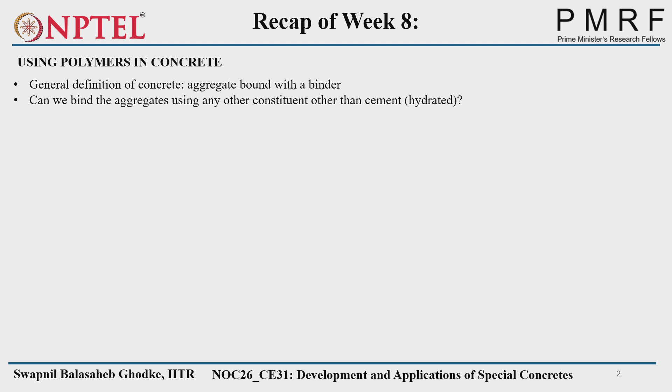So what is polymer or polymer concrete? We know concrete is mainly about inert materials and some binding materials. In the case of aggregate bound with binders, the binder is cement. But is there any other material available which can bind these inert materials? So we have polymers and asphalt. Today we will discuss polymers. Asphalt is mainly about pavement materials.

So three types of polymer concretes are available. First, polymer is used directly as the binder to replace Portland cement in gluing aggregate together. There may be presence of cement or may not be, but the binding properties will be given basically only by polymer, not by cement. We will see this in detail.

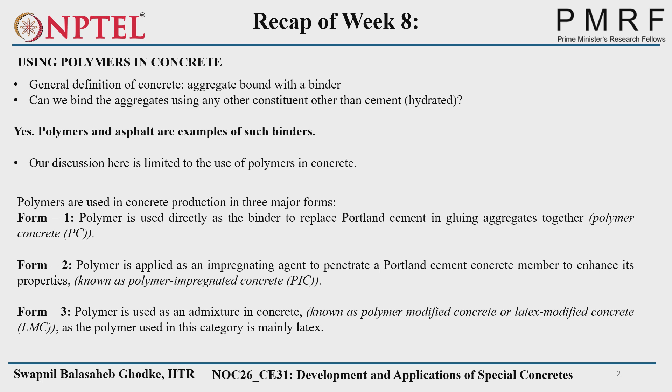Second, polymer is applied as an impregnating agent to penetrate a Portland cement concrete member to enhance its properties. We already have some concrete specimen, and then we impregnate that polymer into the pores. That is the second form of polymer concrete. Third, polymers are used as an admixture or as a replacement of water.

In polymer impregnated concrete and latex modified concrete, the polymer works together with the cement binder. But in the case of polymer concrete, the polymer acts as the sole binder because there is no water available. Although cement may or may not be available, water is not available, so cement will not hydrate if it is present, and that cement acts as a filler, only filling the pores between the concrete matrix.

So the basic concept of polymer concrete is to replace the cement hydration reaction with polymerization to produce a strong and compact material. We know cement hydration is the process to get the CSH gel and the hardened properties of concrete. Similarly, to get the hardened properties of polymer concrete, we have to go through the process of polymerization. So what is polymerization? We'll see in a couple of minutes.

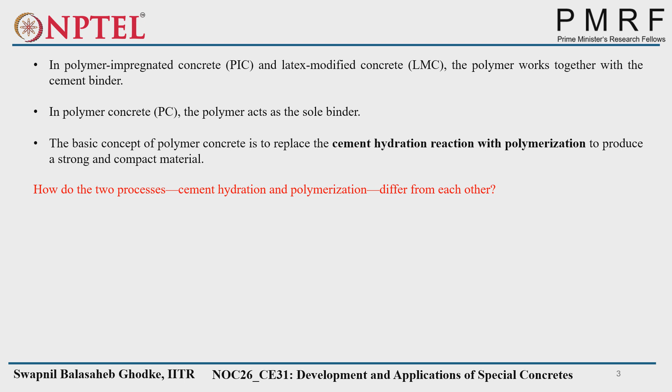So how do the processes of cement hydration and polymerization differ? Basically, Portland cement concrete's binder is cement. It involves a hydration reaction and requires water for that purpose. It is a slow process; we have initial setting time and final setting time. No external heat is required in this case because the reaction itself emits heat - that is an exothermic reaction. Products change with time.

In the initial period we'll have a different value of stiffness or modulus of elasticity. After some time we'll have a different modulus of elasticity. So stiffness changes with respect to time, and the hydration products also change with respect to time. Hydrated products contain voids or cracks too.

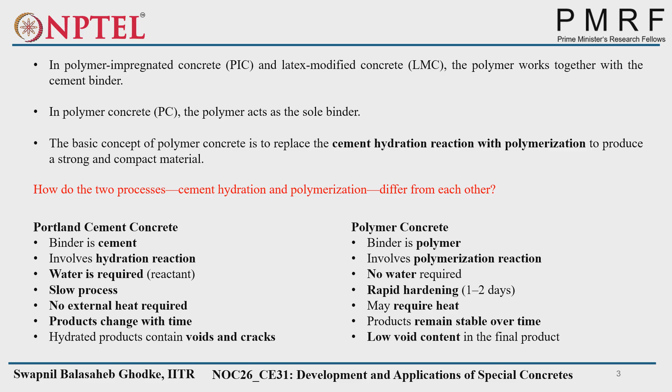But in the case of polymer concrete, the binder is a polymer and it involves a polymerization reaction. Here, no water is required, and hardening is rapid - only 1 to 2 days. In Portland cement concrete, the days required for hydration are more than for polymer concrete; full hydration we consider up to 28 days. In polymer concrete, due to absence of water, we require external heat. Products remain stable over time, with low void content in the final product. So these are the differences between Portland cement concrete and polymer concrete.

So what is polymerization? Basically, polymer is defined as an organic material composed of a series of repeating chemical units, and the single chemical unit is called a monomer. If you see this image, this is the monomer - this is an example.

This is the monomer which has the bond CH equal to CH2. When the polymerization process takes place, this single monomer connects to another monomer, and this CH2 bond is connected together. So a number of monomers connected to each other, that is called the polymer.

This N is indicating the number - how many monomers are connected to each other. It is called a polymer. This process is called polymerization, from monomer to polymer connectivity.

So a monomer is an organic molecular species that is capable of combining chemically with molecules of the same species or with other species to form a polymeric material of higher molecular weight.

You can see this monomer is connected with the same chemical unit. But sometimes in the polymerization process, one monomer connects with another type of monomer. That is also a formation process, and it's called polymerization.

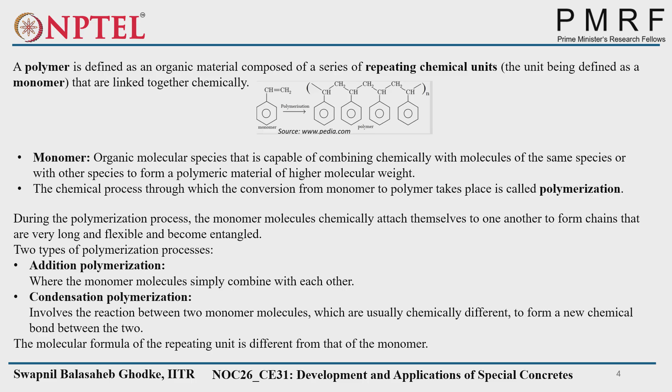So two different types of polymerization processes are there. One is addition polymerization, where we get simple addition; condensation polymerization, where we get chemically different polymers connecting with each other by chemical reactions. And the molecular formula of the repeating unit is different from that of the monomer.

So basically, when it is connected to each other, it creates a chain, and that's why it is also called a chain reaction. Polymerization does not start automatically - it requires initiation by the action of a free radical on a monomer molecule, that is CH equal to CH2. We saw that the free radical will react with the other type of bond and create the polymerization reaction.

Then we have to provide heat also, or in the presence of a promoter. Free radicals are formed by decomposition of relatively unstable material called an initiator or catalyst.

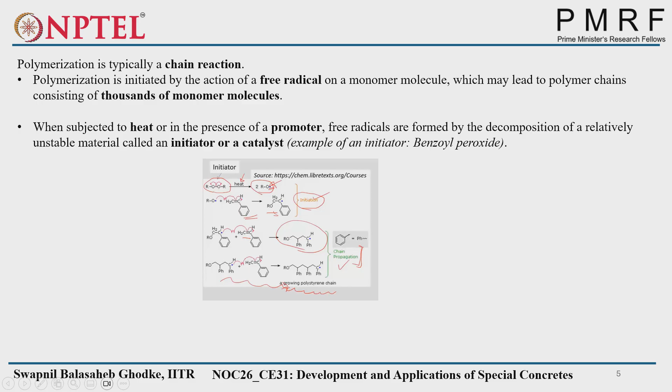In this image, oxygen is bonded here, and if you provide heat, the chemical composition changes, and that acts as an initiator. It connects with some monomer, and that monomer initiates the reaction and connects with another monomer. Then the chain reaction starts, and chain propagation gives a polymerization reaction or polymer, and that polymer we can use in the concrete.

This rate of polymerization, from forming the monomer to the polymer, depends on the concentration of initiator and temperature - meaning the amount of external heat you are providing. If more heat is provided, the faster the reaction, and if the catalyst or initiator is more reactive, you'll get a faster polymerization process.

So what will be the end products? The types of polymers like polystyrene, polymethyl methacrylate. These are some of the types of polymers used in concrete, which should have the required tensile, compressive, flexural strength, and resistance to chemicals.

Why resistance to chemicals? If we are using it in concrete, and that concrete is used in some hazardous environment, it should not react with that polymer. That's why whatever polymers we use should be resistant to chemicals.

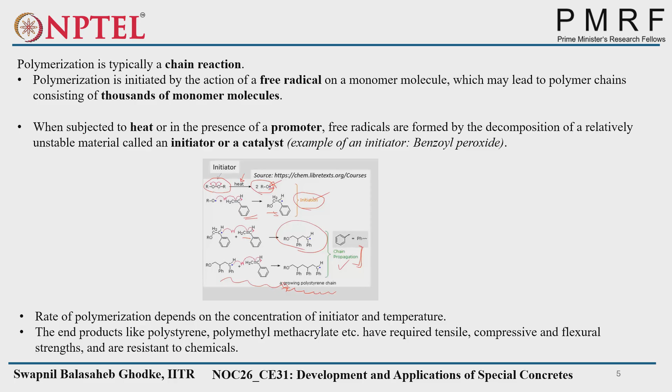And other properties we require according to the concrete are tensile, compressive, and flexural strength.

So how has polymer concrete been developed? First step indicates premixing a two-part polymer system composed of monomers or prepolymers with hardeners like cross-linking agents. Step 2, the mixture is added to aggregate to produce a hardened plastic material with aggregate as a filler.

What is meant by filler? Filler means it will not react with anything, or it will not take part in any chemical reaction - that is called a filler. It is also called filler because it fills the empty spaces between the concrete matrix.

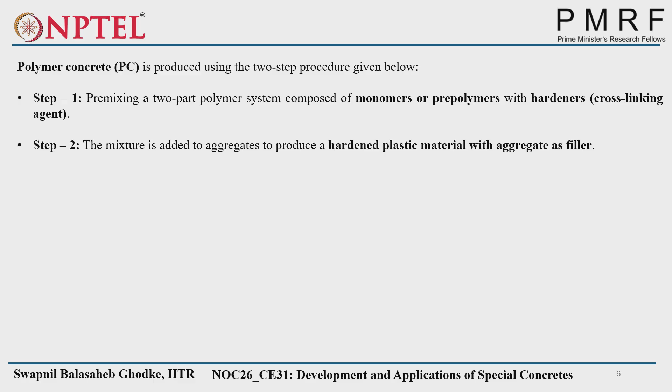One more important point to consider: the aggregate used in polymer concrete should be dry, as polymerization does not occur on a wet surface because it requires heat to initiate the process. On wet surfaces, the polymerization process will not start. The common monomers are MMA, polystyrene, and epoxy. Other components required apart from the monomer are catalyst, plasticizer, fire retardant, and fibers.

The binder here will be only the polymer, which will bind the aggregates. Cement may be there or may not be there, depending on the composition of the concrete. But if cement is present, it will act only as a filler because water is not present, since to initiate the CSH gel reaction we require water as a reactant.

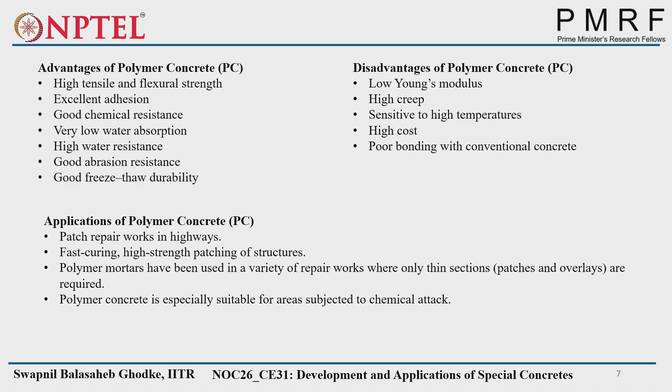So these are the points we have to keep in mind while using polymers in concrete. This was form one, polymer type concrete. Form two is polymer impregnated concrete. So what is polymer impregnated concrete? It is produced by impregnating monomer and catalyst into hardened concrete and polymerizing it using heat, which may be steam or infrared.

What is the procedure? First of all, we already have the precast concrete, suppose some cylinder or cube of concrete. First, we have to dry the concrete. Why dry it? Because we already saw that the polymerization reaction will not take place on a wet surface. For that purpose, we have to dry the concrete.

Then we have to remove the air from the pores, because impregnating means we are pouring the monomer and catalyst into the pores of the hardened concrete. So to occupy the whole pores, we have to remove the air from the pores, then saturate the pores with a low viscosity monomer or prepolymer.

Low viscosity monomer - why do we need low viscosity? If we want to fully occupy the pores, the viscosity of the monomer should be low. If it is high, we have to pressurize more, requiring advanced pressure equipment or pressure conditions to get into the actual condition. And the polymerization will start by the heating process. We'll see with the image also.

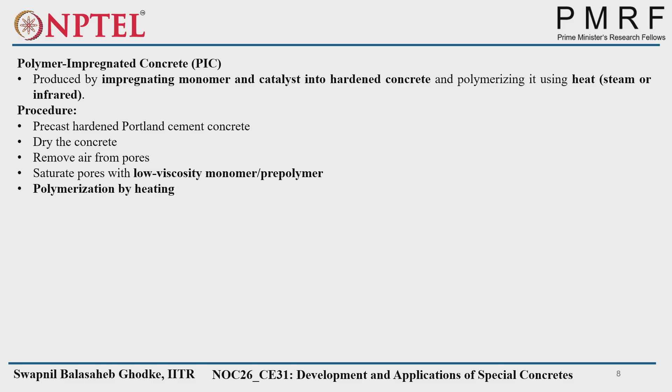This you see, we have a concrete cylinder. First, we heat and dry it to remove all the water from the pores. Then we keep it in a vacuum. Into the vacuum, we impregnate monomer into the pores of that hardened concrete, along with the catalyst to initiate the polymerization reaction. Then we provide heat, and at last we get the polymer impregnated concrete.

So why do we go with evacuation of air, or the vacuum process, while impregnating concrete? Because we need to remove all the air from the pores to fully impregnate the monomer and catalyst. If we are not fully removing the air, it will not occupy fully, and we will not achieve the full potential of this concrete.

If pores are available, we will have less durability. Any hazardous material that comes into contact will go into those pores and affect the concrete property, so durability will be affected. For that purpose, we have to remove all the air and fill all the pores with the monomer and catalyst.

If you see, we are not providing polymer here; we are providing monomer and catalyst. The polymerization process starts when we give heat. Only then does polymerization start. So can anyone tell me...

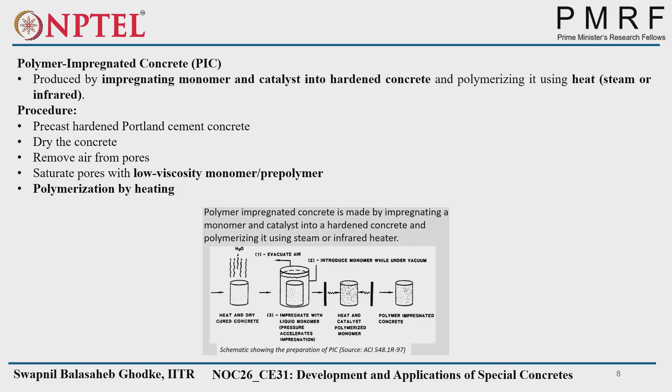Whether this concrete will have higher or lower durability compared to normal concrete? Higher - because we are filling all the pores with monomer and catalyst, which converts into polymer. So with no pores available, no external hazardous factor or material will come into contact and go into the pores to affect the hardened properties. But in normal concrete, there will be a certain amount of voids available, and if they are connected, they will create a permeability issue also.

So what are the common monomers used for polymer impregnated concrete? That is methyl methacrylate, styrene, acrylonitrile. That's why, because of the pores being filled, we have lower permeability and diffusivity than conventional concrete.

So where will we use this type of concrete? Industrial floors, sewer pipes, where we should not have sewage material leaching out. That material should not get into contact with the outer soil or outer water bodies. That's why it's used in sewer pipes, seawater storage tanks, structural members in desalination plants, water plants, and tunnel liners - basically wherever we don't want pores in the concrete.

In water plants also, if the water tank is there and the concrete has fully connected pores, there is a possibility that outer water will contaminate the water inside the plant. So the pores should be limited, and for that purpose we can use this type of concrete where pores will be fully occupied through the polymerization process - also used in tunnel liners.

For RCC also, they are using this. Because what happens is this polymerization in RCC also creates an oxidization layer around the rebars, and that reduces corrosion also.

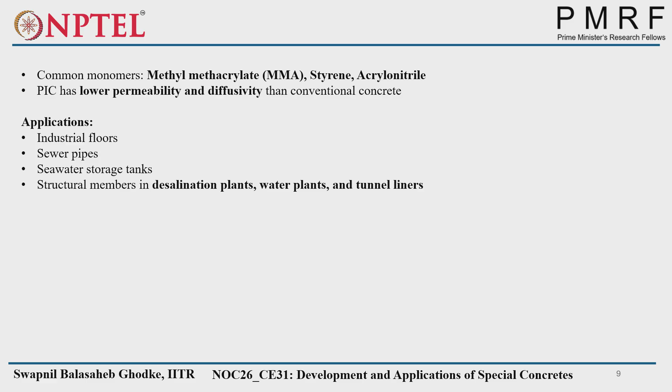In tunnel liners also, whatever the tunnel we have excavated, that tunnel liner should be such that there is no water permeating from outside the tunnel to the inside. So for that purpose, tunnel liners should be impermeable, and for that purpose we can use this type of concrete.

The amount of monomer impregnated depends on the total void space in concrete. Obviously, whatever void space is available, that amount of monomer will only be occupied by the concrete.

Vacuum or thermal drying removes air and water, increasing monomer absorption. Applying pressure reduces the time required for monomer impregnation. Higher the pressure, less time required. Lower the pressure, more time required to fully impregnate the monomer into the concrete voids.

The third one is latex modified concrete. Here, the polymer or latex will be added into the Portland cement concrete mixture during the mixing process. So hydration will occur as well as the polymerization process will occur. Both cement hydration and polymer film formation process occur together, forming co-matrix phases of cement and polymer.

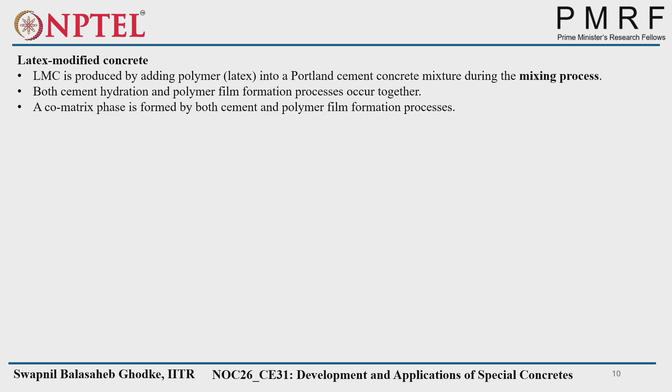We will see with the help of the image how that combined process is carried out. There is a three-step process.

Step one: the polymer particles are uniformly dispersed into the cement paste phase, initially during the mixing phase. Step two: with the development of the cement gel structure, that is CSH gel, the polymer particles are gradually confined in the capillary pores, whatever capillary pores are available after gel formation. Step three: with the removal of water during cement hydration, the close packed polymer particles on the cement hydrates coalesce into continuous films or membranes.

As further cement hydration uses that water, these polymer particles surround the cement particles or aggregate particles. The membrane binds the cement hydrates together to form a monolithic network. As both reactions occur together, they form a monolithic network to get the intact property of latex modified concrete.

So the polymer phase interpenetrates throughout the cement hydrate phase. Such structure acts as a matrix phase for latex modified mortar and concrete. The aggregates are bound by the matrix phase to the hardened mortar and concrete. So latex modified concrete is produced by adding latex polymer during mixing.

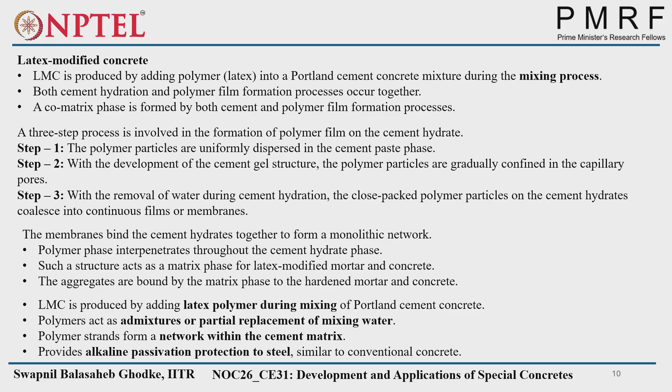Polymer strands form a network within the cement matrix. As you asked earlier about reinforcement, this network provides alkaline passivation protection to the steel, similar to conventional concrete.

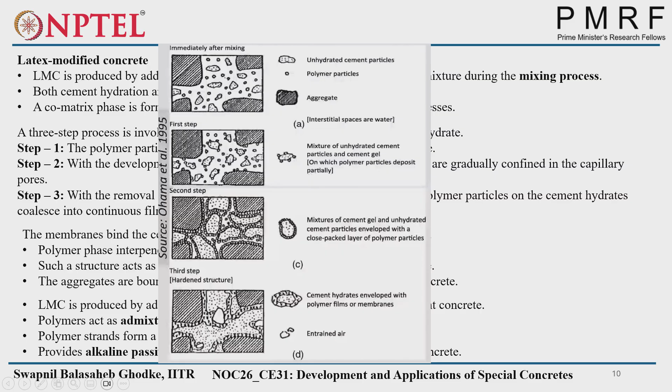Because of that, whatever voids are available will be occupied by this polymer film, so the voids will automatically get closed. A certain amount of air will still be available, which will not be filled with this polymer.

But in the case of the previous polymer concrete, the air will be completely removed because we are going with impregnation. Here, a certain amount of air will be available. This also has certain advantages, because due to the certain amount of air available, the freeze-thaw resistance will be higher compared to the previous polymer concrete.

So a certain amount of air void should be there in the concrete. We also consider this in the design mix, where we use 2% of air. And if you want to go for freeze-thaw resistance, we go up to 4%.

Latex can be natural or man-made. Natural latex is obtained from rubber trees, whereas synthetic latex is produced through chemical processes. The synthetic latexes include copolymers of styrene, butadiene, acrylic copolymers, styrene acrylic, vinyl acetate ethylene, and polyvinyl acetate. These latexes consist of organic polymers formed from a combination of monomers such as styrene, acrylic, butadiene, and vinyl acetate.

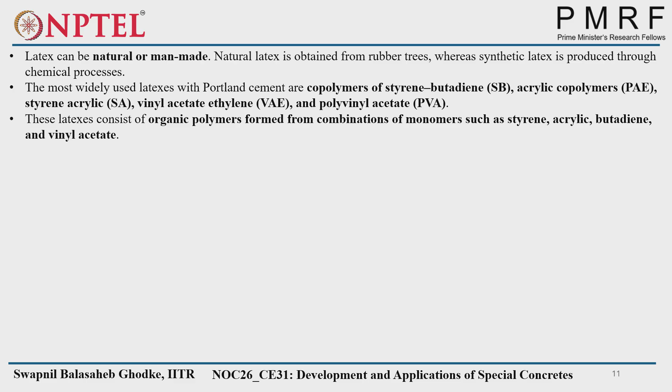The main thing is that latex is usually present as a dispersion of very small polymers in water. It is a solution, where the small polymer particles available will be in the range of 1500 to 2500 angstrom, which is 0.15 to 0.25 micrometer. That small amount of polymer particles disperses into the water.

So how much? The solid content of latex emulsion is about 50%. That means 50% will be water and 50% will be polymers. That is the content of the latex.

So when you are using Portland cement concrete and you want to add 15% polymer solids by weight of cement, you cannot directly add that, because latex has only 50% efficiency. So you have to add 30% latex to get 15% by weight of cement. If you added only 15%, because of its 50% efficiency, you would only get 7.5% solid polymer.

Since latex emulsion introduces additional water into the mixture, the mixing water must be reduced accordingly. Which additional water are we getting? Because latex, as we saw, is a combination of 50% water and 50% small dispersed polymers. So that additional water is provided by the latex, which is why we can reduce the water we add for the hydration process.

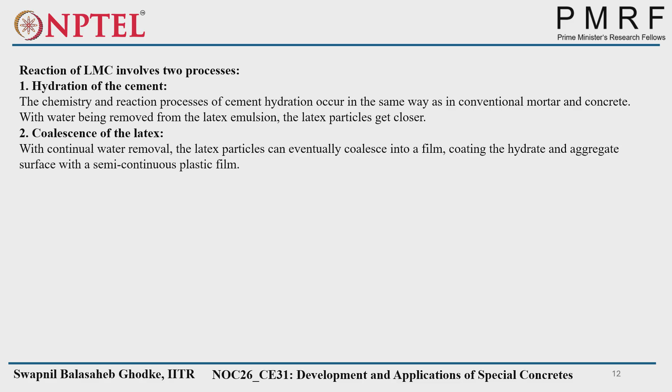So what are the properties we are getting with this type of concrete? It affects properties in the plastic stage and hardened stage. Plastic stage means you are in the initial hardening stage, initial setting stage, or a couple of minutes after that.

In the plastic stage, the combined characteristics of the latex and antifoam cause some air to be entrained in the mix. That air will be helpful as a lubricant, and because of that lubricant, we get higher flowability.

Since we are already reducing the water, we want to maintain the flowability. That flowability is maintained by these entrained air voids.

Another thing is that workability also improves due to the dispersing effect of surfactants. Whatever surfactants we are using have this dispersion effect, meaning the particles repel each other or create distance between each other, which again creates flowability or workability.

Setting time of latex modified mixes is generally controlled by the hydration of Portland cement. Here, setting time is not controlled by the polymerization process; it is controlled by the hydration process because we are using water for hydration purposes.

However, the working time for finishing may be shorter because the latex will dry and film formation is caused by evaporation of water from the mixed surface. This does not allow much finishing time, so the execution time will be less for this type of concrete.

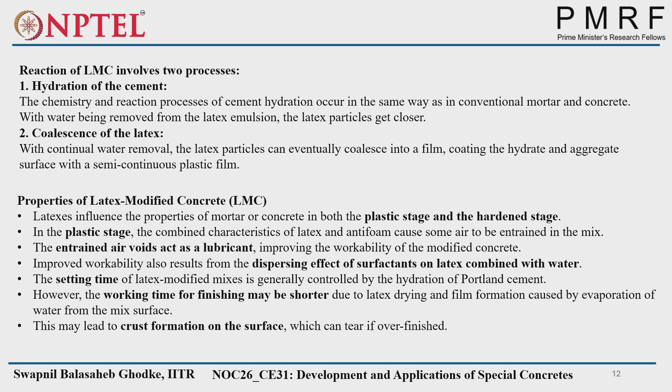Once it hardens very fast, crust formation occurs on the surface. When finishing, there will be cracks or crust formation on the surface. But in the hardened stage, if you keep all these points in mind and complete all finishing in the plastic stage, the hardened stage will give more benefits.

It improves adhesion, tensile and flexural properties, permeability resistance, and chemical resistance. The bond between the latex modified mortar and concrete is chemical in nature, forming a homogeneous combination of materials. It is very important that this bond is very strong and has been observed to not break.

The concrete is not broken at the bond; it is broken in the parent concrete itself. But in the first case, with polymer concrete, the bond was not as proper between composite concretes. So this latex modified concrete bonding is stronger than polymer concrete.

Latex also seals pores, significantly reducing permeability to both gases and liquids. Studies indicate it reduces carbonation depth and chloride permeability. As we are reducing the pores, hazardous material will not come into contact or get into the pores, preventing CO2 ingression and chloride penetration.

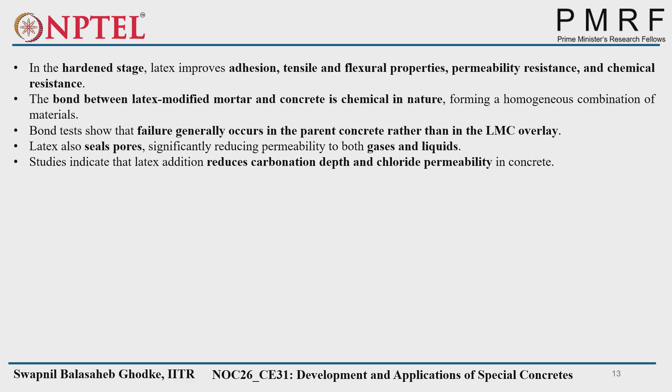That gives better durability. So where can we use this type of concrete? Emergency concreting in mines and tunnels, ceramic tile adhesives and grouting, swimming pool finishes, industrial floor toppings, production of high strength precast elements, and widely used as a repair material, especially for overlays on bridge decks and concrete highways.

Now you can see uses for very important structures like production of high strength precast elements, and repair material for overlays on bridge decks and concrete highways, because its bonding is much stronger compared to the other two types of polymer concrete. That's why it is used in these applications.

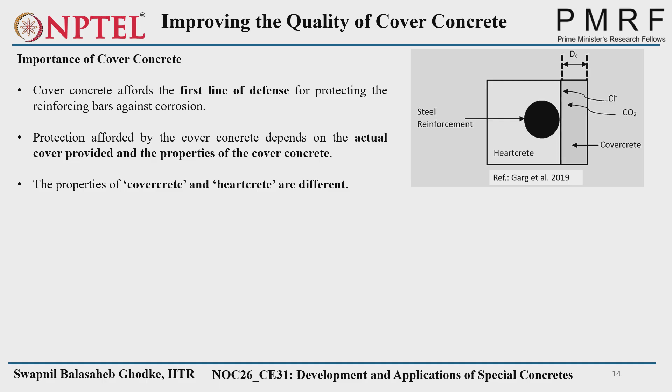Another thing is whatever formwork we are using - that is the main thing creating different behavior into this concrete. There is an increase in the water to cement ratio in concrete in the neighborhood of the impermeable formwork. We use impermeable formwork such as steel plates or wooden plates, which will not allow water to evaporate from the external surface, while at the same time giving the standard shape to that specimen.

But what happens when we go for vibrating that concrete? At vibrating time, the water will move towards the formwork side, so that's why a higher amount of water is available near the formwork and wherever the cover is actually provided. So when you remove the formwork, that water will evaporate and create pores.

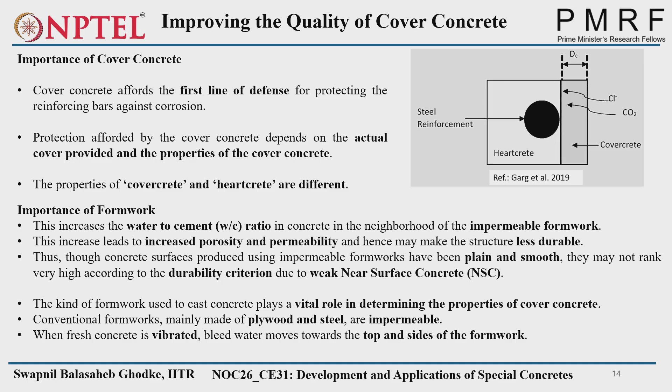That's why the strength and durability of this cover concrete will be less as compared to the heartcrete. This is also called weak near surface concrete. So the kind of formwork we are using plays a very important role in construction sites. But most of the time we use plywood and steel, which are impermeable, so how can we avoid this difference between the covercrete and the heartcrete concrete?

There are certain solutions for that purpose. The first one is use of silane. So what is silane? Silane is a material which can be applied over the hardened concrete surface - after hardening of the concrete, you can apply it to the outer surfaces. It will fill the pores because it creates a hydrophobic layer inside the pores.

It will deeply penetrate into the capillary pores, and it will not allow water or any salt material or any hazardous material inside into the concrete matrix. If it is not allowing that, it will give good durability aspect. But the treatment is not permanent - it requires periodic application.

Periodic applications widely used in bridge structures. Usually it is said that after every 4 months you can apply this silane. So automatically the cost of maintenance also increases in this case.

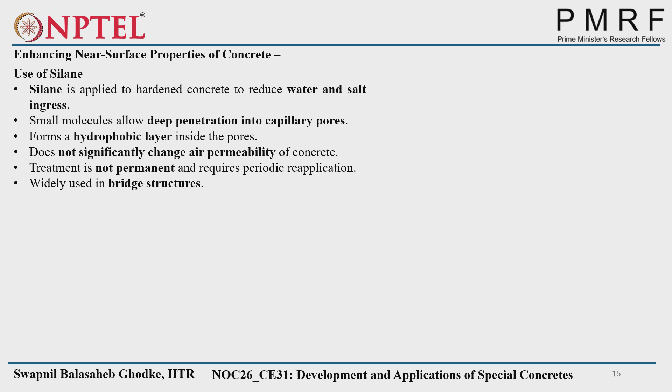Another solution is use of microsilica. Microsilica consists of very fine silicon dioxide particles, 0.1 to 0.2 micrometer, which has very high surface area. High surface area means the reaction will be faster, enhancing hydration reactions, and improving strength and durability of concrete.

How it improves strength and durability: microsilica is used in the concrete mixing itself. Since it has very small particles, it creates hydration reaction initially, and it also gives later strength by filling the pores through later formation of CSH gels.

We saw this plenty of times in previous lectures - whatever supplementary cementitious material is available, when we use it in concrete, it gives strength at the later stage of the hydration process. That's why we get a microstructure that is very compact and dense, which will be less permeable.

It will reduce the bleeding and porosity of near-surface concrete. Why does it reduce bleeding? Because the smaller particles with larger surface area occupy all the water initially itself. It is used widely in Scandinavian countries but limited elsewhere because the cost of microsilica is very high compared to other cementitious materials. So its use is very limited, but Scandinavian countries like Denmark, Norway, and Sweden are using this.

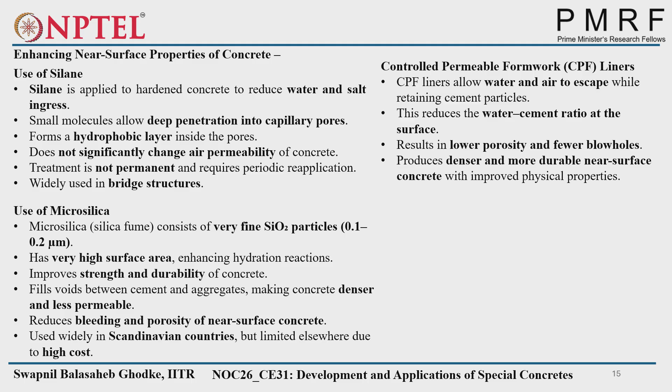Another solution is controlled permeable formwork, CPF liners. CPF liners allow water and air to escape. Let's see this with an image.

Once air and water get removed, we have a very compact and denser structure, so it is more durable, improving the covercrete properties as compared to normal concreting. That's why CPF liners are very popular.

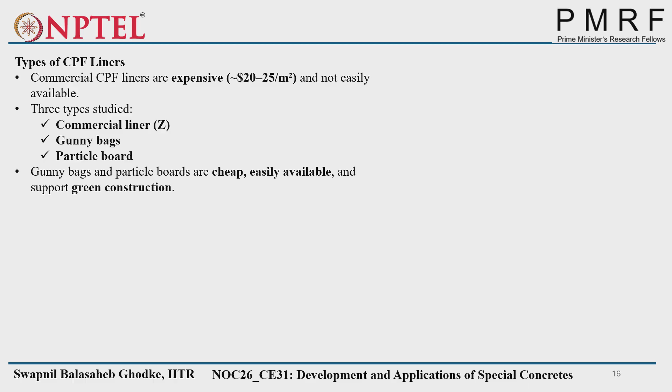Gunny bags and particle boards are cheap, easily available, and support green construction, because anyhow gunny bags and particle boards are being discarded, and are easily available at less cost. So he used these materials.

With the commercial liner, he found that the Z liner shows the maximum improvement in surface properties. Gunny bag and particle board also improve the surface quality, and gunny bags are a cheap, locally available alternative to commercial CPF liners. But the fabric impression from the gunny bags appears on the surface of the hardened concrete, which we don't want - we want a plain surface.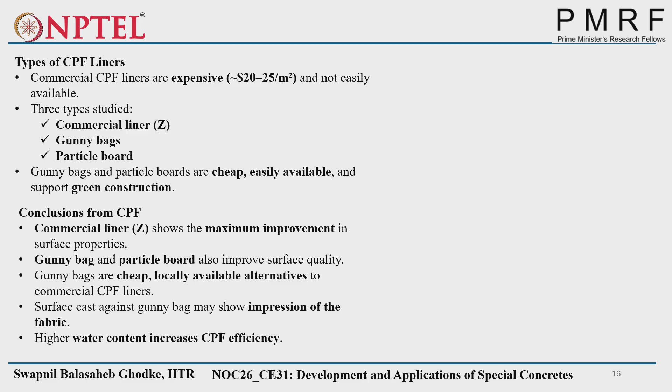Higher water content increases CPF efficiency, because higher water content leads to higher evaporation, and it will not create any voids. These are some of the solutions; studies are still going on to find the appropriate solution for these purposes.

Further, another solution is permanent formwork. The use of this type of permanent formwork in India is very limited. You will mostly see this type of formwork used in European countries, or in some Asian countries like Japan.

Permanent formwork means the formwork stays in place. It will not be removed after the concrete hardens. The formwork will remain in that place itself and act together along with that hardened concrete.

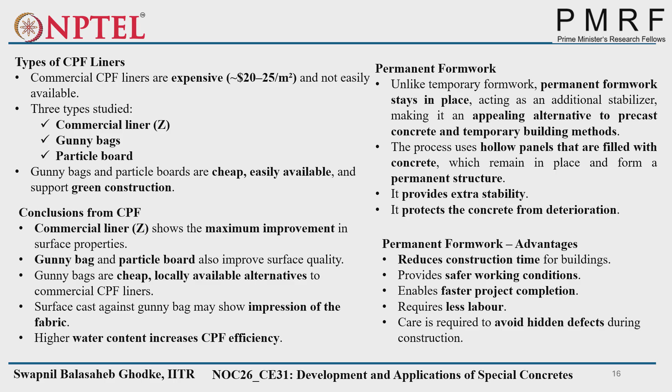But care is required to avoid hidden defects during construction. Hidden defects means you have to be careful that no honeycombing appears. Proper compaction should be ensured inside this permanent formwork.

So there are different types of permanent formwork. This is profile steel. This is like a steel mesh which has some voids. Here's the precast concrete panel. In precast concrete panels, some ribs are available, and we can keep it in place and do the concreting over that, and that rib can act as a connecting part of the concreting.

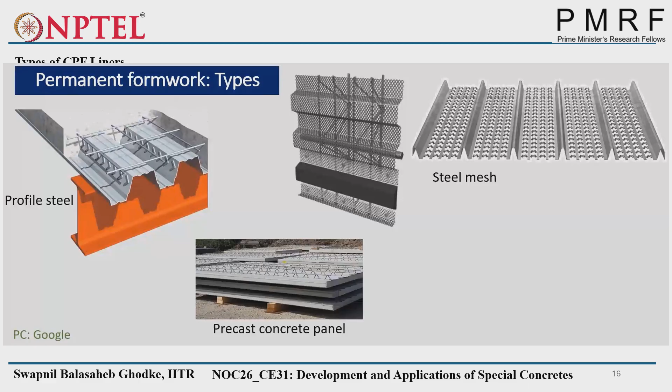First of all, we'll see profile steel. Common uses are beam and slab type concrete floors with formwork spanning between either steel or concrete beams, and ribbed floors within the depth of permanent formworks supporting members. Whatever profile we have will support the members.

Advantages include large span capability, and it's lightweight and easy to handle since it's a steel sheet only. It stiffens the supporting steel frame and is easy to cut and fit for irregular shapes. We can cut it and place it in any shape wherever required according to the construction site conditions or requirements. It also provides good sealing by lapping panel edges.

Disadvantages: care has to be taken, as ribbed profiles can be difficult after installation, like access to that area. An exposed steel sheet may be vulnerable to fire, so for that purpose we have to take care, like providing extra reinforcement for fire resistance.

Next is steel mesh. Steel mesh has small openings similar to the largest aggregate size. Common uses are construction joints in slabs, deep construction joints, vertical construction joints to walls, wall and column formwork for further finishing, soffit formwork, and curved wall formwork.

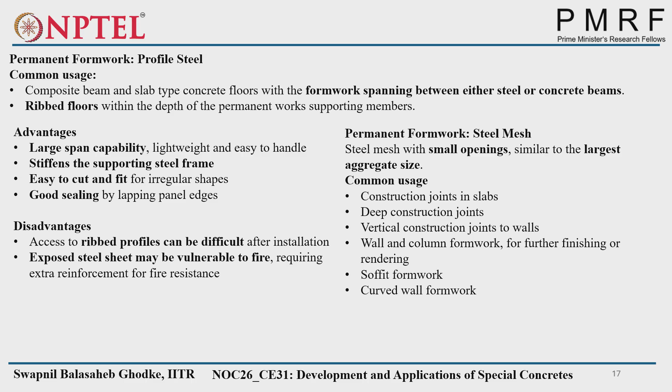Because the steel sheet has less thickness, we can give it any other shape, so curved wall formwork can also be used. Advantages: it is light and easy to handle, and easily cut and fitted to awkward shapes by unskilled labor, so no skilled labor is needed to cut and fit it into place.

Concrete pour can be monitored from the partially exposed face because some voids will be there, so we can see the concrete pouring and check it's going into every place, without any honeycombing or voids.

Disadvantage: unformed face which is acceptable for stop ends to receive further concrete must be rendered or faced to achieve fair finish. Because of the small voids in the mesh, there is a possibility that the surface finish will not be uniform - into those voids the finishing will not be proper. So if you want a proper finish, you will not get it with this one.

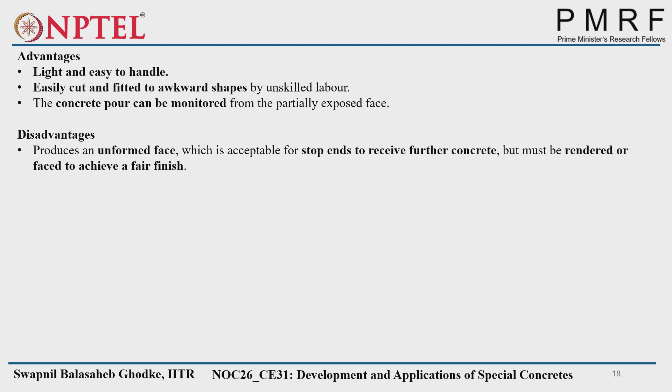Another type is precast concrete panels. These panels are usually 2400 wide, reinforced by welded lattices. This type of W-shaped or triangular welded bar lattice will be there, which projects to provide mechanical linkage, and half the concreting will already be done.

That's why it is called precast concrete panels. After concreting, it will be intact or fixed with that one, and the ribs bars will give the bonding between the new concrete and the old concreting.

It can be used for composite concrete floors, steel or concrete beams, and composite bridge decks, whether steel or concrete. The advantages are quick placement over large areas, large span capability, and compatibility with concrete structures.

But the disadvantage is that it will be very heavy, so it requires mechanical handling and may affect reinforcement detailing. If you have very congested reinforcement, for those purposes we cannot use this one.

Positioning tolerance may also cause issues. Sometimes you are using a width like 2400, but in actual casting, the width may get reduced or increased, so that tolerance will not be there, and that will affect the further properties of the concreting.

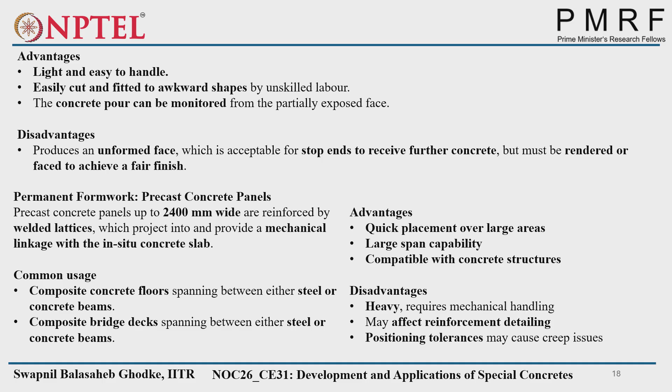So these are the formwork issues. We can use different types of formwork to get the cover crete similar to the heart crete, to avoid further durability issues.

Next we'll see compaction of concrete. It's a small topic but very important. Why is compaction required?

If air is present, it will affect the strength of the concrete. If those air voids are connected to each other, it will create durability issues due to permeable concrete. That's why compaction is very important.

But how much time is required for compaction, according to the particular concrete, is also very important. You cannot compact too much and you cannot compact too little. So optimum time is very important.

Why do we have to remove voids? To achieve the maximum density of the concrete. Vibration reduces internal friction and helps proper aggregate packing.

So vibration is one way to compact concrete. If you provide vibration, it helps reduce the internal friction between the aggregates, and they go into the available space, reducing the voids in the concrete matrix.

Further, it improves abrasion resistance and durability. Obviously, when voids get reduced, it will reduce permeability, and also affect creep and shrinkage.

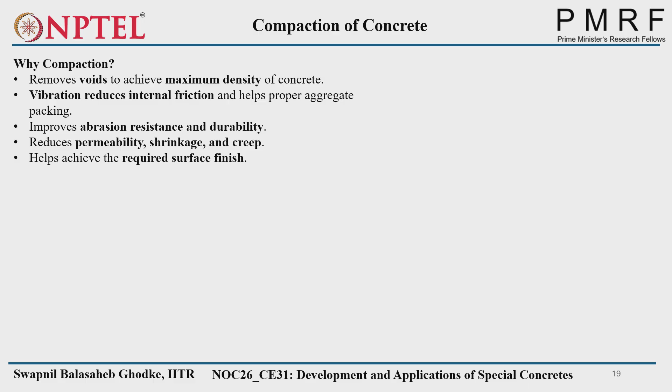For creep, if the concrete structure is very dense, the continuous constant load coming onto it will be borne perfectly by that concrete structure, and it helps achieve the required surface finish.

Compaction is considered a two-stage process. One is aggregate particle movement. When you are doing concrete compaction, first the concrete fills the form and levels the surface with the help of liquefaction.

This means once you are using the concrete poker and applying vibration, initially the slump and workability get improved, and that levels the concrete surface.

But the voids present in the concrete take a little more time to expel from the concrete matrix. That's why we have to be careful about the timing of compaction.

Compaction can be done by rodding, tamping, or vibration, but vibration is more efficient and popular.

So the concrete liquefies and the surface levels, giving the impression that the concrete is compacted, but it is not actually compacted, because entrapped air takes a little longer to rise to the surface. So you have to continue compaction until air bubbles no longer appear on the surface.

If you look at a vibrating table used for compaction, initially some workability improves and the compaction looks fine.

But if you continue a little more, a certain amount of voids or bubbles will be seen coming out onto the surface from the concrete matrix. So you have to take care of that.

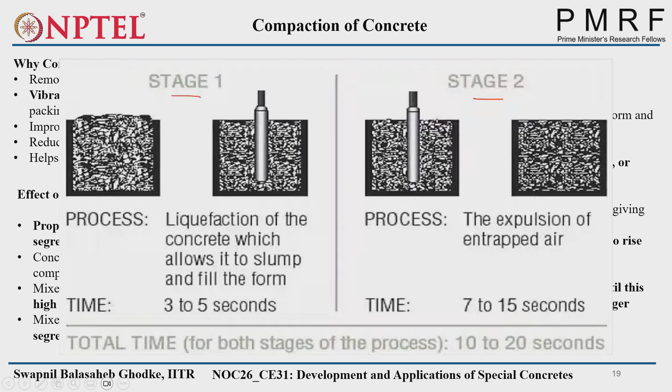This is the schematic of that one also. You can see the first 3 to 5 seconds, the liquefaction of the concrete which allows it to slump and fill the form. Next 7 to 15 seconds, the expulsion of entrapped air will happen. Then only we'll say that the compaction of concrete is complete.

So total time for both processes is about 10 to 20 seconds. Further effect on fresh concrete is that low workability, that is stiff mixes, very hard mixes, requires higher energy or higher amount of time for vibration to fully compact that concrete. Particularly if you see the no slump concrete, we saw the roller compacted concrete, right? In that case, the roller has to be placed over that concrete multiple times to get it properly compacted, and there we are using one of the geotechnical rules, that is compaction with the optimum moisture content.

So more workable mixes require less energy, obviously. Whichever has the higher slump, less energy is required to get proper compaction. But if we still provide higher compaction, segregation and bleeding will happen.

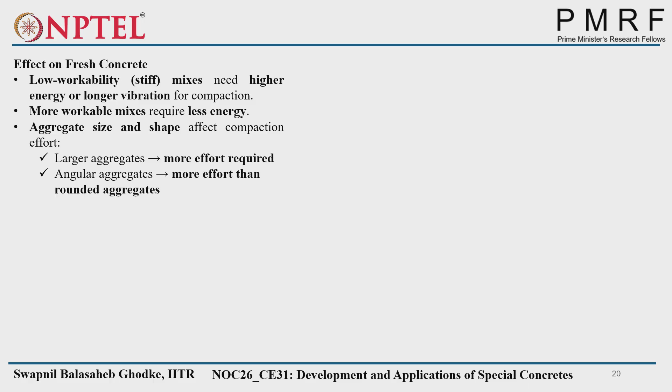Another factor, aggregate size and shape also affect compaction. Larger aggregates require more effort. Angular aggregates require more effort than rounded aggregates. Why? Rounded aggregates easily have lubrication between the particles, but angular aggregates mechanically interlock with each other, so they require higher effort, meaning higher vibration, as compared to rounded aggregates.

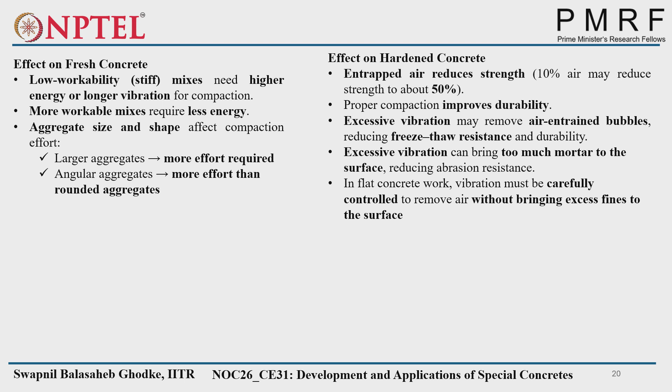So if we do not properly compact the fresh concrete, what happens to the hardened concrete? Entrapped air reduces strength almost 50% for 10% of air. Proper compaction improves durability due to reduction of voids. Excessive vibration may remove air entrained bubbles, reducing freeze-thaw resistance and durability. Excessive vibration can also bring too much mortar to the surface and create laitance, reducing abrasion resistance. So vibration must be carefully controlled to remove air without bringing excess fines to the surface.

Over compaction should be avoided because for low workability mixes, it only wastes higher vibration energy. So we have to find out at what time we are getting the maximum density.

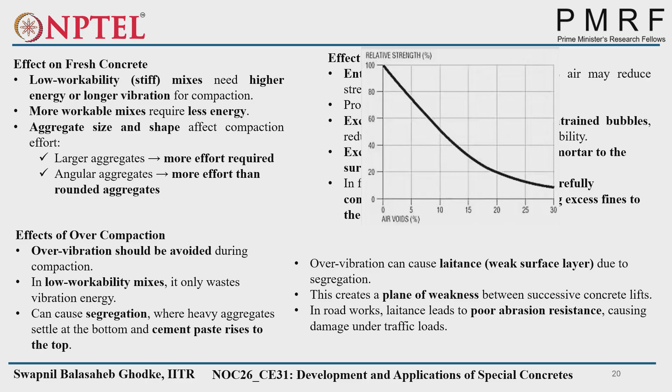Over compaction can cause segregation where heavy aggregates settle at the bottom and cement paste rises to the top. When you are doing something like a column, you cannot place it in one lift. For a large height column, you are pouring in continuous lifts, and during that time you do some higher amount of compaction for the lower part. So what happens is the cement particles come to the surface, creating laitance, a weak surface layer. And when we give another lift of concrete over that one, a cold bond forms, which is a weak bond between the two surfaces. That should not be there.

That's why sometimes we remove that weak surface. Other adverse effects include honeycombing and formwork damage, because it creates higher pressure. With more compaction, the pressure of the concrete comes onto the adjacent formworks. Bleeding, where water and cement paste rise to the surface, causes cracks and weak surfaces.

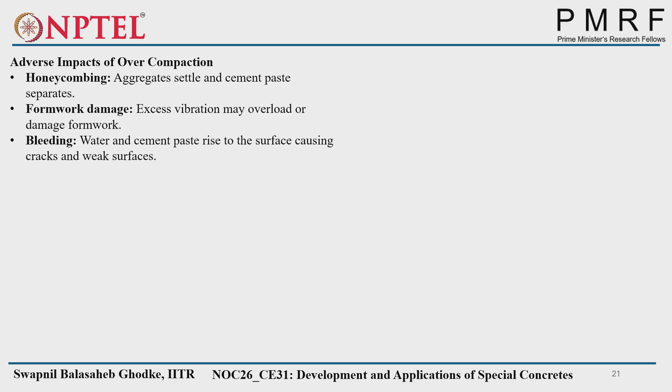These are all about compaction. But how do we do the compaction? Two types: hand compaction and mechanical compaction. Hand compaction, everyone is aware about, we do it with a rod. This compaction rod, the code has given certain dimensions for that rod. It's used for workable concrete mixes usually, where we don't want to give more energy by hand.

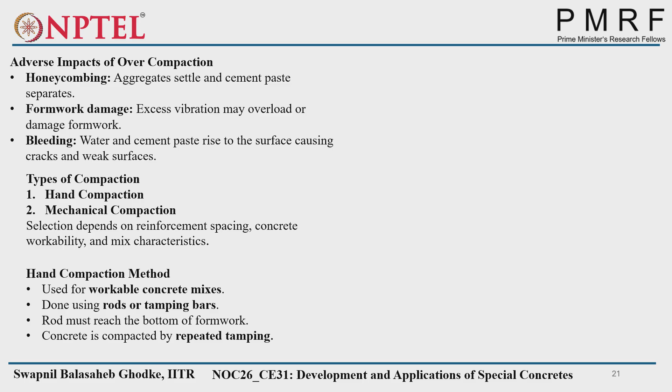Hand compaction is done using rods or tamping bars. The rod must reach the bottom of the formwork. Concrete is compacted by repeated tamping. Usually, if we are using it in the lab, for a cube, we will go with 25 strokes in three layers, if you remember, according to the IS code.

Mechanical compaction is different from that. It's generally used wherever low slump concrete is there, like low water to cement ratio, high coarse aggregate content, heavy reinforced structural elements. For those purposes we require higher energy, which we cannot give with hand compaction. That's why we go with mechanical compaction.

Three types of mechanical compaction are available: shock or drop table compaction, centrifugation, and vibration, out of which vibration is more popular. Shock or drop table is generally used to compact very stiff, low slump concrete, mainly in precast concrete production.

Shock or drop table means there will be a table where we put the concrete into a cube or some formwork. The table will rise some distance and then drop, like a flow table. It drops with a certain frequency and certain amplitude, which creates vibration in the concrete and gives compaction.

Centrifugation involves what we call a cylinder type setup, which is rotated by a motor. Because of the centrifugal force, which pushes outward from the center toward the surface, when the cylinder rotates at high speed, the concrete gets compacted onto the surface.

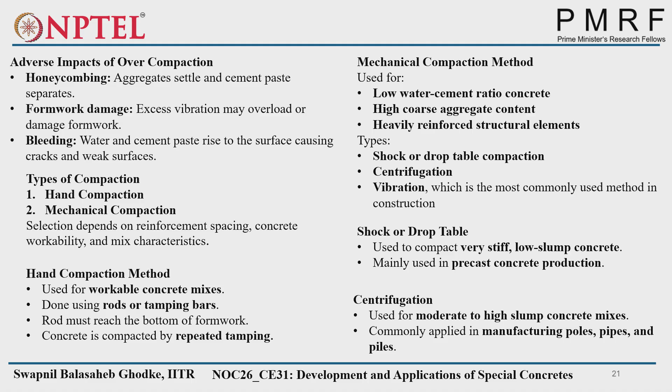Next is the vibration method. Vibration reduces internal friction that rearranges cement and aggregate particles to achieve dense packing. The most commonly used vibrator on site is the poker vibrator.

It consists of a poker with an eccentric shaft driven by a motor. The poker is immersed directly into the fresh concrete, creating compression waves in the concrete. It can operate at 3,000 to 6,000 RPM, up to 12,000 RPM.

Its recommended vibration insertion spacing is 0.5 to 1 meter. For example, if you have a long column or long slab, at that 0.5 to 1 meter spacing, you vibrate the concrete for 5 to 30 seconds. While pouring and withdrawing, do it slowly to avoid trapping air.

Poker diameters can be as small as 20 mm for congested reinforcement. The concrete layer should not exceed 600 mm thickness, or 10 times the poker diameter. This is the limit of the poker. For example, with a 20 mm poker diameter, 10 times that is 200 mm thickness of slab you can vibrate. For 600 mm thickness, you would need a 60 mm diameter poker for proper compaction. This is the upper limit for poker concreting.

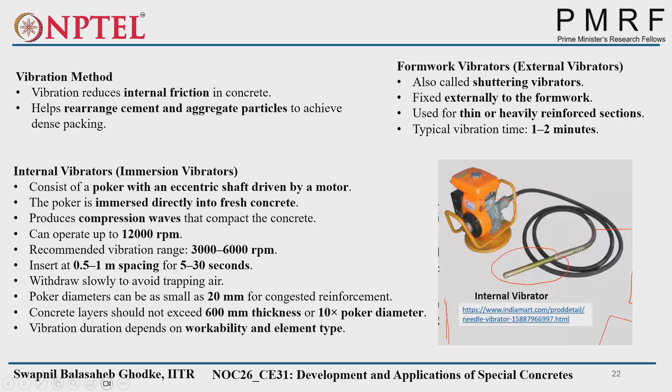Another type of vibrator is the form vibrator, also called external vibrator, since we are not keeping it inside the concrete. It's called a shuttering vibrator. Whatever formwork we have, we keep the vibrator around it and vibrate the material to get compaction. This is usually used for thin and heavily reinforced sections, where we cannot use the poker. Typical vibration time is 1 to 2 minutes for this purpose.

You see this schematic: suppose this is the external vibrator, this is the formwork, and you keep it here, providing external vibration. This creates vibration waves inside the concrete.

It's generally used for compacting concrete through vibration of the formwork. We have to be careful about the frequency and amplitude of the vibrator, as it depends on the size and design of the formwork, since vibration must be conducted through the formwork, and also on the thickness and size of the specimen. High frequency vibration generally requires high amplitude, with low frequency for very stiff mixes. Very stiff mixes need high amplitude to get fully compacted, while very workable concrete needs very low amplitude.

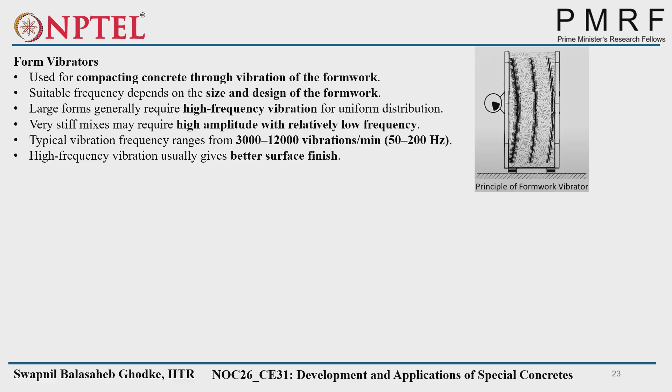Another is table vibration, which is generally used in the labs also. Here is the principle, you can see these are the vibrators below the table. The table will get vibrate, and it will create these compression waves into the concreting surface, and it will compact because of that one. This is the table vibrator type. These are the springs we have here.

Table vibration uses harsh and stiff concrete mixes, commonly in laboratory methods. We all in the civil engineering laboratory will have this type of vibrators. It consists of a steel vibrating table mounted on a flexible spring. Typical frequency 50 to 100 hertz, and acceleration will be 4g to 7g. Widely used in precast industries.

Table vibrator used in precast industries. Another type of vibrator that we saw is drop table, that is also used in the precast industries. Large vibration amplitudes are required for effective compaction, produces higher strength and density in concrete.

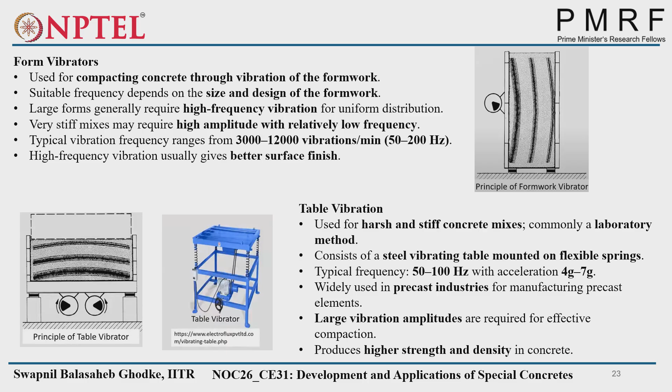Now this is also external vibrator. Here the limit is that slabs up to 250 mm thick. Commonly used for precast slabs and retaining walls. Retaining walls, it is more popular compared to the precast one. And 3000 to 6000 vibrations per minute, 50 to 100 hertz frequency, 5 to 10 g usual accelerations.

Compaction efficiency depends on the static load, amplitude, frequency, and rate of travel. Rate of travel means you have to travel with this one. Two persons will be there, one person here, one person here, and it has to travel from here to here. Suppose this is the surface, you have to travel from here to here. The distance you have to find out, how much distance you have to keep it in that one.

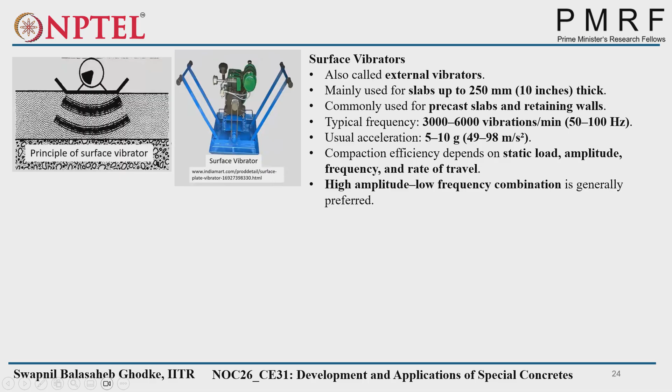Similar high amplitude and low frequency combination is generally preferred. Similarly for all the external vibrations, you have to go with the high amplitude and low frequency combination to get the greater surface finish. But what happens if we are not giving the proper vibrations to the concrete?

It may be under vibration or it may be over vibration. Under vibration creates honeycomb, voids or cavities into the concrete due to poor compaction. Sand streaks, linear deposits of sand onto the concrete surface due to bleeding, that is over vibration.

Cold joints, weak plane. We saw that cement particles will come into the surface, and on the second lift, if you pour into the concrete, that weak bonding will come into the picture. Bug holes, small surface cavities caused by entrapped air bubbles during the placing and vibration. Subsidence cracking means cracks form due to the settlement of some of the concrete around the reinforcement.

Placement lines, visible lines between the successive layers of concrete caused by improper placement and compaction. Like this, this is the honeycombing due to poor compaction, and this is the visible lines because of improper compaction. This may be very stiff concrete or maybe not properly compacted.

That's why poor finishing is there and cold joint formation will be there. There is a possibility that ingress of external hazardous material comes into contact, goes inside, and creates the durability problem.

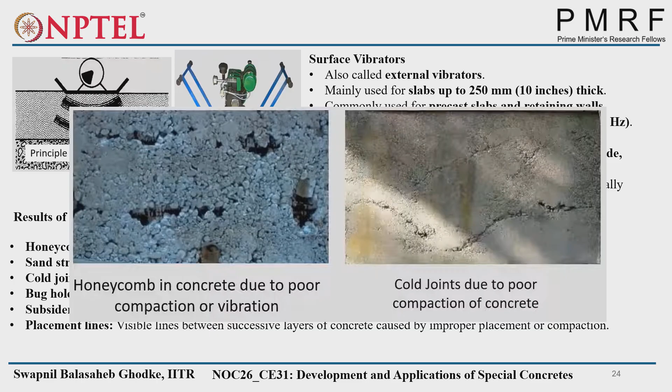So these are all about the compaction. We already saw some of the precast concrete things in previous lectures. This is a very short thing we will see. The precast industry is mainly popular because it gives good quality control over the surfaces or the concrete specimens.

Particularly this yard you can see, these are the sleepers, railway sleepers. This is the sleepers casting yard, and this is the sleepers heading out casting yard. So mainly used for these purposes. Apart from that, you can see the bridge girders also, you can precast.

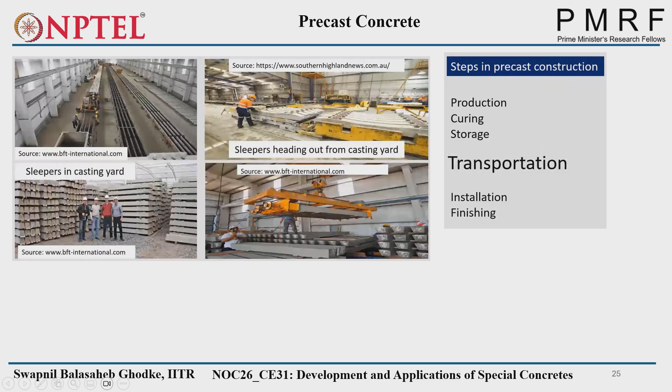The precast industry is very big due to its popularity, because of the greater quality control in warehouses as compared to the site. So the steps in precast construction will be the before and after. Pre is production, curing and storage. Post will be installation and finishing. In between comes transportation. These are all very important steps inside precast construction.

In precast construction, curing is mainly done by steam curing. Steam curing means curing of concrete using water vapor at atmospheric or higher pressure. The temperature range will be mean between 40 to 70 degrees if it is at atmospheric pressure.

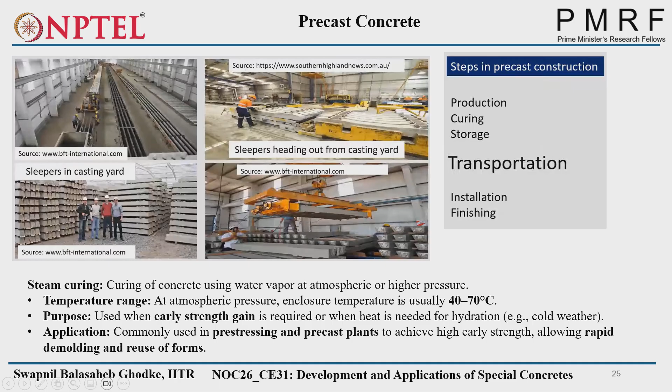The purpose is early strength gain, because as we are creating in the warehouse, there will be a continuous production process. So we have to create early strength gain to remove the formwork as early as possible. Application: pre-stressing and precast plants, to achieve high early strength, allowing rapid demolding and reuse of formwork. So steam curing is used in pre-stressing and in precast plants also.

When going with steam curing at atmospheric pressure, prefabricated elements are usually stored in a chamber and steam is applied at atmospheric pressure. But there is an observation that slightly higher drying shrinkage and moisture movement will be there at atmospheric pressure. Moisture movement means moisture moving from the concrete surfaces or concrete matrix. As the moisture is moving, there is a movement of water that causes the drying shrinkage.

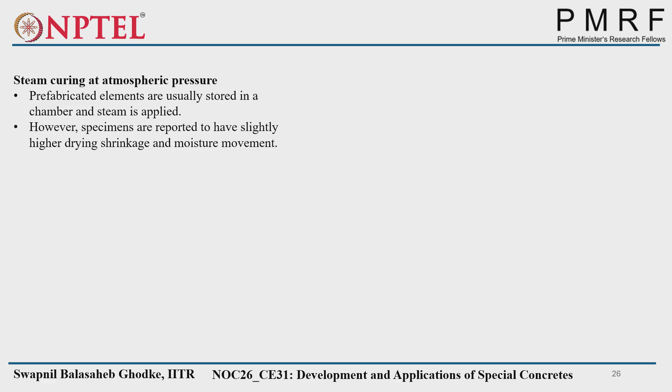But in the case of the high pressure process, the autoclave will be used for that purpose. It is a closed steel chamber and the chamber must be steam tight, so continuous operation is not possible. Continuous operation means we keep a specimen into the autoclave and the autoclave is closed until curing is complete. We cannot keep another concrete specimen in it, so that is a discontinued process.

Temperature and pressure are controlled during curing. Temperature in the high pressure process will always be between 120 to 160 degrees Celsius, and the steaming period is short.

You use a pressure vessel, a curing chamber with steam pressure above atmospheric pressure. Here we are going with above atmospheric pressure, so high early strength and durability will be there. Along with that, it reduces the drying shrinkage, moisture movement, and efflorescence. So basically two things: when going with atmospheric pressure there is a possibility of higher drying shrinkage and higher moisture movement, but when going with the high pressure process, it reduces the drying shrinkage and moisture movement. Along with that, there is resistance to sulfate attack also.

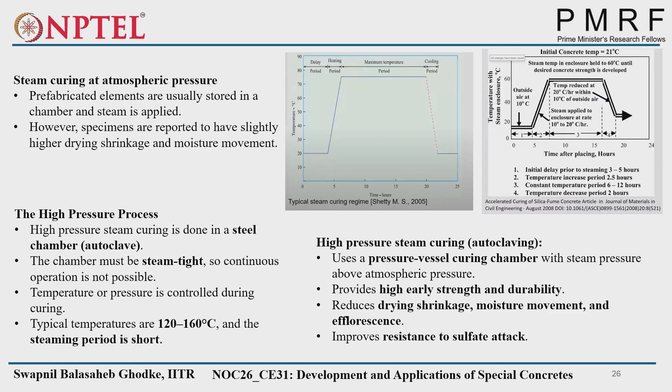Low pressure continuous process - we saw closed processes earlier, now we are seeing the continuous process. In continuous process, specimens will be continuously moving inside. Concrete units are prepared mostly for mass production, particularly for sleepers, railway sleepers. There you can use the low pressure continuous process.

Concrete units are prepared on a conveyor which carries filled molds or pallets into a long tunnel where steam curing takes place. It will be placed into pallets on a conveyor belt, and the steam curing will be a continuous process. In short, high temperature tunnels, doors may be fitted to conserve heat, and this is the case.

Haulage is usually intermittent, the rope or conveyor advancing by the distance of one truck as the doors at each end are open. In a long tunnel, a temperature gradient may be deliberately formed at each end, and in this case doors may be left open without undue loss of heat. Haulage in this case is usually continuous.

The door may be closed if it is a shorter space between the low pressure continuous spaces - doors of that tunnel may be closed to avoid heat loss. If the tunnel is too long and you have maintained heat losses or temperature gradient at certain places, leaving the door open will not affect the loss of heat. So it depends on your tunnel size or tunnel length.

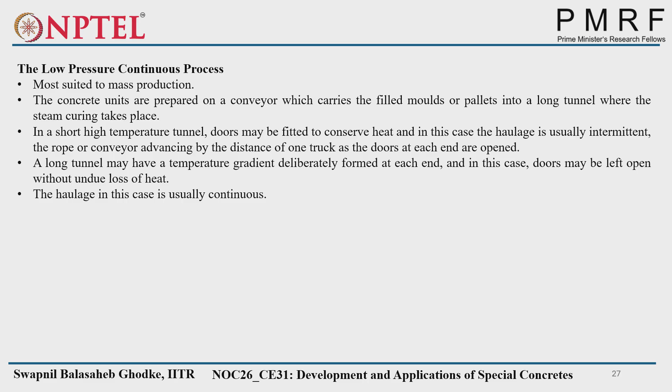Heating of curing chambers: the heat transferred to the surface heats the interior of the unit by conduction through the mold and outer layers of the concrete. The method of heating employed should produce the acceleration of strength required for the least expenditure of energy, and all units should be heated to about the same temperature.

In addition to the external heat, the heat generated by the chemical reaction in concrete is expended in heating the concrete to the desired temperature. So along with the exothermic reaction, whatever heat is created is also used and expended in heating the concrete to the desired temperature, maintaining the temperature of the curing chambers.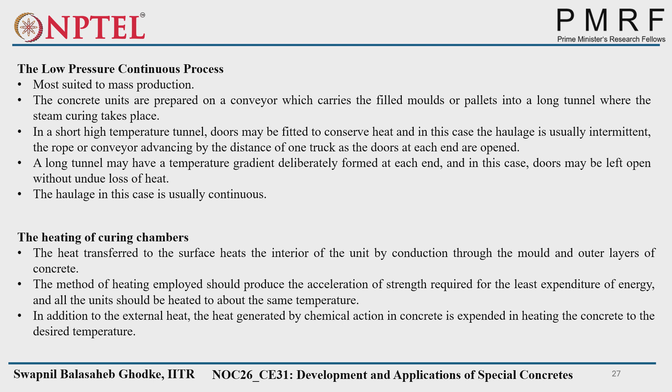These are images of steam curing. You see, this is the steam curing - it is a closed one. And this is steam curing, an open one, which is at atmospheric pressure.

So this is the precast related things we discussed very shortly and saw, mainly about quality control. Another point is, if you are going with mass production, you have to go with the continuous process of steam curing. And if you are going with smaller samples, you can go with the closed process also - you can go with atmospheric pressure or above atmospheric pressure.

Another very short and important point is that, as we all know, from the materials perspective we are trying to achieve sustainability in every aspect. Because cement production generates a higher amount of CO2, almost 6 to 8% of the world total, we are trying to reduce cement usage. We are trying to use alternatives to cement, such as supplementary cementitious materials.

We are trying to use recycled materials or industrial waste into the concrete, and research is going on for that purpose. So another thing is recycled materials - how we are using recycled materials, because there is large generation of it.

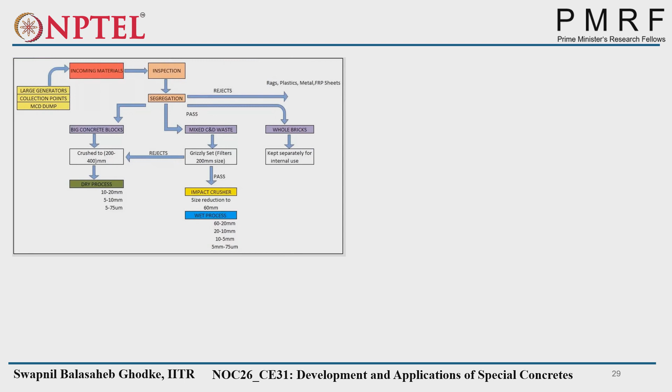That's why research is going on, and a certain amount, like up to 30%, is an acceptable replacement. Beyond that, you have to do a mock test and find out the properties of the recycled aggregates, and also of the recycled aggregate concrete, to determine the use of that aggregate in your concreting.

IS 456:2000, which is the basic code for design and construction of concrete structures, allows aggregate and sand not drawn from natural resources to be used in concrete. However, it is difficult for recycled aggregate to satisfy the requirements of natural aggregate.

The real need is to look at the possibility and implications of lowering the bar of aggregates to be used in concrete for certain grades or applications. This means it is not at all possible to maintain the same crushing strength or properties of natural aggregate with recycled aggregates. So we have provided certain bars, or certain properties or provisions, that should be fulfilled by the aggregate. That bar can be reduced for certain types of concrete which are not very important, where we can use recycled aggregates and also reduce the use of natural resources.

So this is a short review of week 8, the last week of this very interesting course, Development and Applications of Special Concrete. I hope you have gotten some idea from this, and once you go through the lectures, you will get more detailed explanation from Professor Mishra sir.

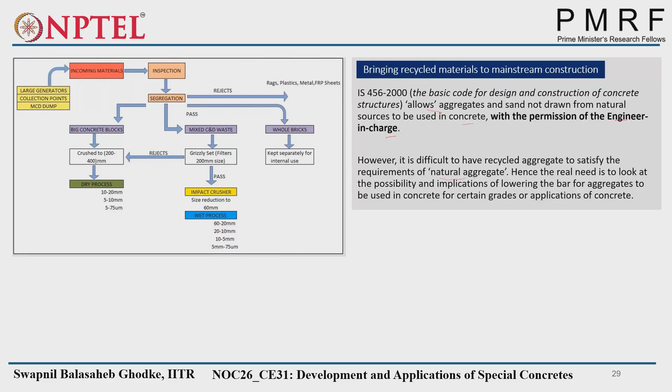Okay, if anyone doesn't have any doubt, we'll move forward with the questions. The first question is: in the context of latex modified concrete, consider the following statements. Statement 1: the monomer is impregnated through the pores in concrete by applying pressure and heat. Statement 2: both the cement hydration and polymer formation occur in the concrete. So what will be the answer?

Both are false? Option second, you are saying? First one is true, second one is false? So you see, they are saying latex modified concrete. Latex modified means the third form of polymer concreting. The monomer being impregnated through the pores by applying pressure and heat is not latex modified concrete—that is impregnated polymer concrete, the second form. So the first statement is false.

The second statement, that both cement hydration and polymer formation occur in the concrete, is correct, because water is available, cement is available, so hydration will form, and at the same time polymer formation will also occur. So statement two is correct, statement one is false. The answer is option third. Understood? Any doubt?

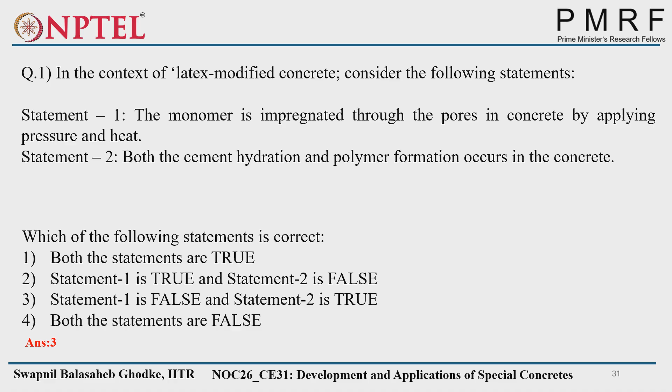Second, in the context of using precast concrete units as part of a construction plan, consider the following statements. Statement 1: use of steam curing at the plant facilitates earlier release of formwork. Statement 2: the members could be vulnerable to toppling unless they are appropriately secured.

So what will be the answer? Anyone?

So I will give a hint for the second. See, the precast unit will be cast into the warehouse, right? And it may be a very long length column or a larger length beam. So if you want to place a large column into the site, there is a possibility it will topple unless you provide some security or bracing to support it.

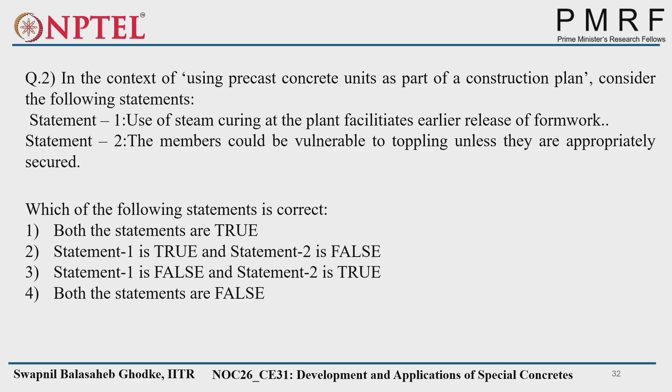In that aspect, this statement has been given because if you are casting onto the site, there is no need to support anything apart from the formwork. But while fixing, we have to give support. So what will be the answer now? Answer one: both statements are true, because steam curing also we are using to release the early formwork, as it increases early hydration.

Statement three. In the context of polymer impregnated concrete, that is PIC, consider the following statements. One: monomers are added as additives in fresh concrete mix. Statement 2: PIC has low permeability than conventional or normal concrete. So what will be the answer?

Both are false. See, the first statement is that monomers are added as additives - wrong, it is not added as additives. We are pressurizing and keeping them into the pores, right? So the first statement is wrong.

Second, PIC has low permeability than the conventional normal concrete - this is true, na? Statement two is true because we are pouring the polymer or monomer into the pores. So the pores will get full and will not allow any external material inside. So permeability will be low than conventional concrete. So the first one is false and the second one is true.

So any doubt in that one? Okay. So in the context of high pressure steam curing of concrete, consider the following statements. Statement 1: it increases the early strength of concrete. Statement 2: it reduces drying shrinkage in concrete due to an increase in moisture movement. What will be the answer now?

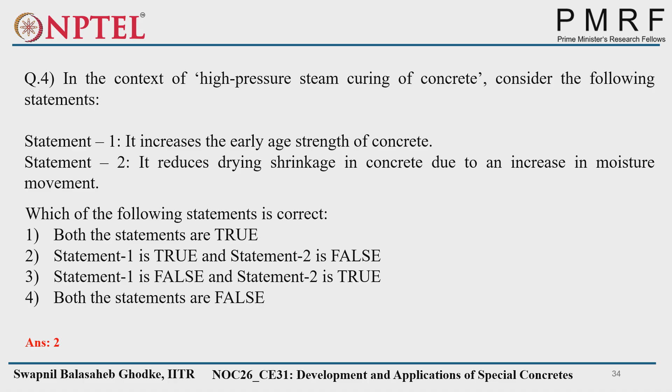Next, in the context of compaction of concrete, which can be considered to occur in two phases. Statement 1: phase 1 involves redistribution of coarse aggregates into a more compact configuration. Statement 2: phase 2 involves gradual removal of entrapped air. So both are correct, okay. Any other answer?

Right, because this is like a 10 to 15 to 20 second process. That is phase 1 - it will first create slump-like workability, and then that workability allows surface finish, and then gradual removal of entrapped air will happen as the vibration or compaction process continues. So these are the two phases.

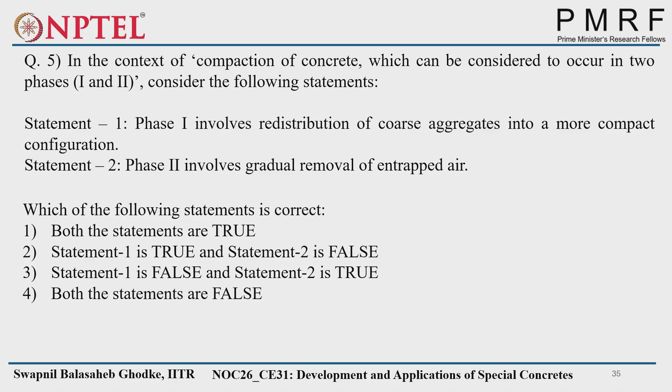So in the context of steam curing used for concrete, statement 1: it should not be used for very large members. Statement 2: it facilitates early removal of formwork, which increases productivity in precast plants. So what should be the answer now? Second is true, right? What about the first?

So in the context of concrete, statement 1 says controlled permeability formwork liners allow bleed water to escape and reduce porosity of the concrete in the neighborhood of formwork. Statement 2 says use of microsilica in concrete increases the bleed water when being placed.

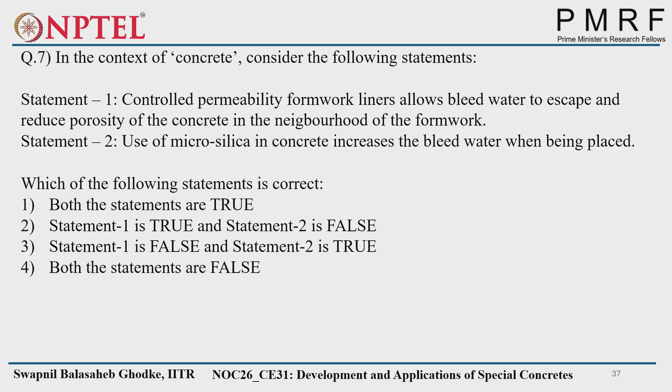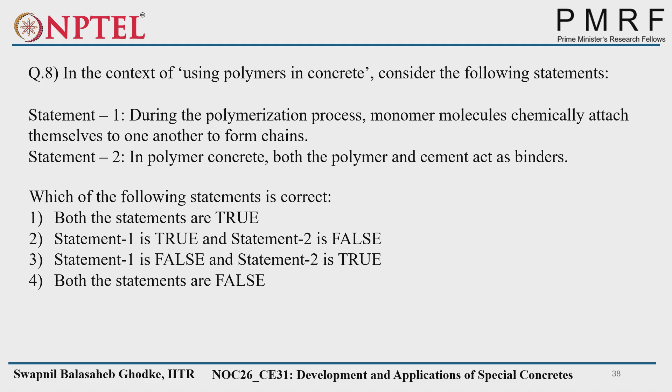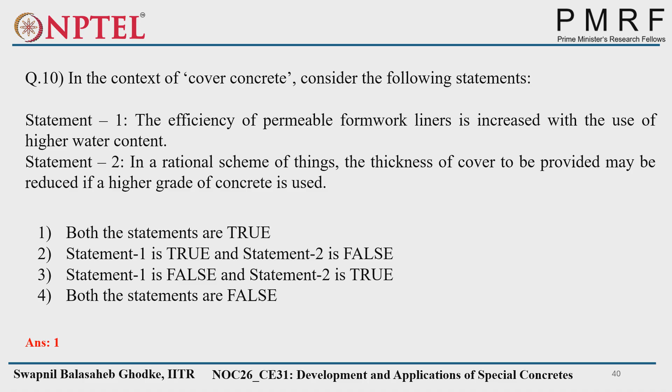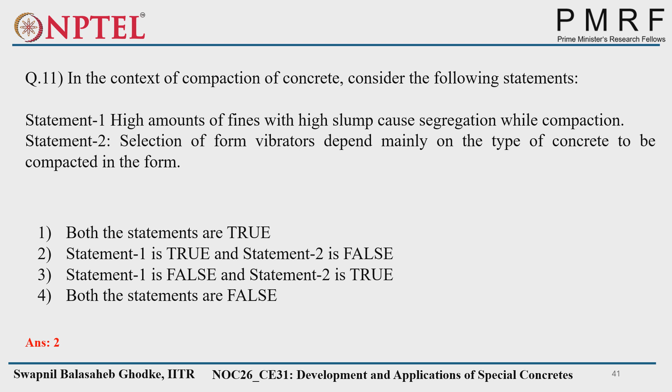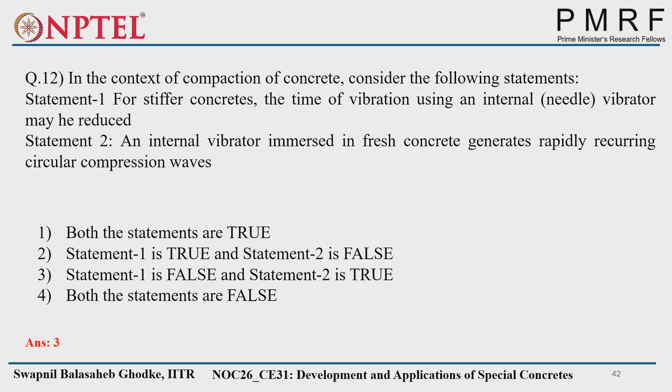So for stiffer concretes, the time of vibration using an internal vibrator may not be reduced. It should be high for stiffer concretes to get the proper compaction. For workable concrete, it should be low. And statement 2 says an internal vibrator immersed in fresh concrete generates rapidly recurring circular compression waves. That is correct. So statement 1 is false and statement 2 is true. So the option will be 3.

So these are some of the questions from this week 8. I hope you understood, and if you have any doubt, please let me know. If you have any doubt from previous sessions also, please let me know.